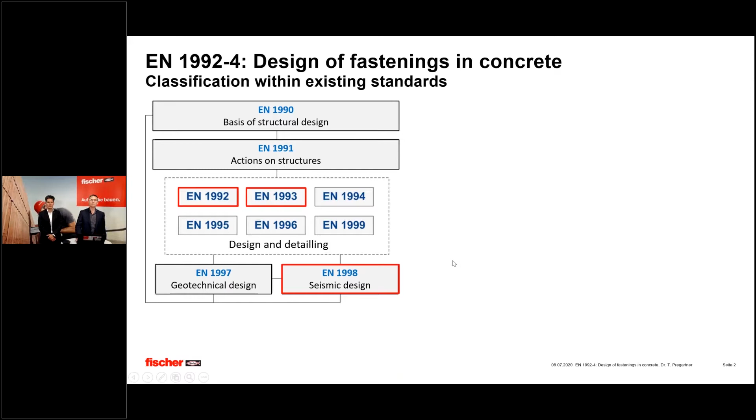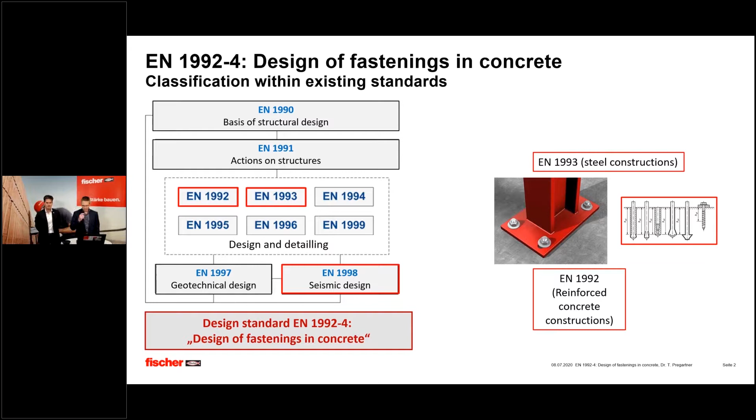We have one Eurocode for geotechnical design, and Eurocode 8 for seismic design. There are 3 Eurocodes in red boxes, which are Eurocodes 2, 3, and 8. Why is that? It is because in general, if we talk about fastening technology in concrete, we try to connect steel structures with reinforced concrete structures. And according to the base material we are anchoring in, EC2 Part 4 was published as an additional part of Eurocode 2.

It's called Design of Fastenings in Concrete. A quick overview of the status before Eurocode 2 Part 4 was published. On the left side, you see as examples 6 different papers, documents or guidelines which were used before Eurocode 2 Part 4 was published for the design of anchors. So we had, for example, Technical Report 029 for design of bonded anchors. We had the famous Annex C, which was the first ETAG part and the first European paper about the design of anchors in concrete.

We have something for fire, something for seismic design, anchor channels, and we had the technical specifications. All that changed with the publication of Eurocode 2 Part 4, which superseded all prior existing design guidelines in the framework of European technical assessments published by EOTA.

Yeah, I already have the first question. We had that when we were running this online seminar in Germany. There was the question: is Eurocode 2 Part 4 already introduced? Can we already calculate according to Eurocode 2 Part 4? And the second question: is it still allowed to use the old one when we see that probably we are a little bit better with the old one?

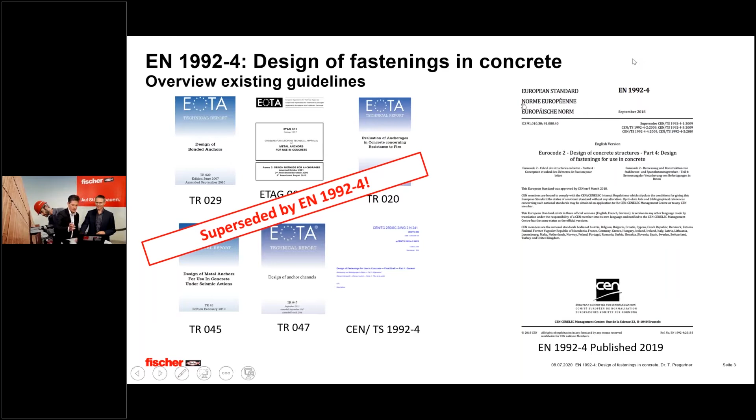Part 4 offers a lot of advantages, some of which I try to summarize on this slide. With publishing it, the most recent state of the art in terms of anchor design in concrete was published. It is now a standard instead of a guideline, which changes the legal validity of anchor design in concrete.

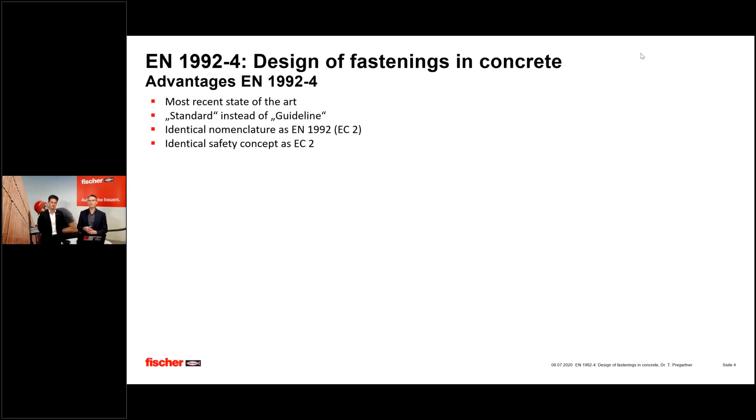Besides that, the nomenclature and the safety concept of anchor design was adapted to Eurocode 2 and in general to the Eurocode system. Besides that, you have a variety of different anchor systems that you can design with only one document, for example metal anchors, adhesive anchors, but also cast-in-place solutions like headed studs or anchor channels.

Pretty much the same is valid for different loading types. Static and quasi-static loads are covered, of course, in EC 2-4, but also seismic design for seismic loads, dynamic loads, and design for fire attack. In general, EC 2 Part 4 provides a lot more transparency of anchor design in concrete and gives you in one document everything you need as an engineer.

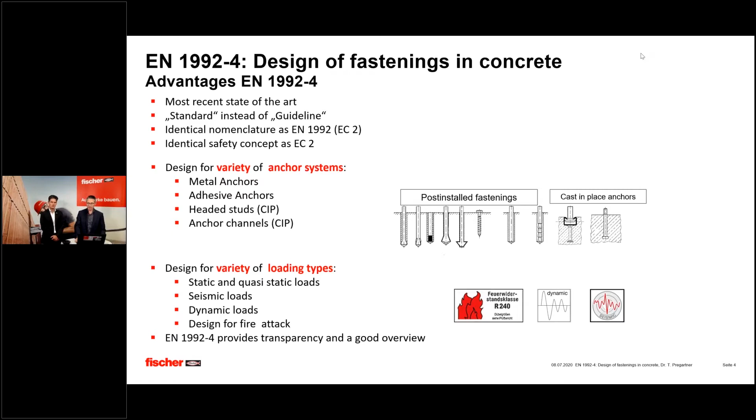Perfect. One of the most important requirements when you work with EN 1992-4 is the fact that you can design only products that have a European technical product assessment. EN 1992-4 was published in the framework of CEN, the European standardization body, and it provides general rules and equations for the design of anchors and fastenings in concrete.

However, as input parameters for the design concept, you need details of the anchors. These details are called performance parameters, and performance parameters are published in European technical assessments, ETAs. Based on ETAs, you are also allowed as a manufacturer to affix a CE mark on your product, and you can get an ETA if a European assessment document exists for it. This is also called an EAD, and it provides the methods and criteria to derive the performance parameters which you need finally in EN 1992-4 to have a valid anchor design.

One question on that slide from my side. So you have the design method implemented in a code. Can you also imagine the performance parameters one day being integrated into a code, or do you not see that for the midterm future?

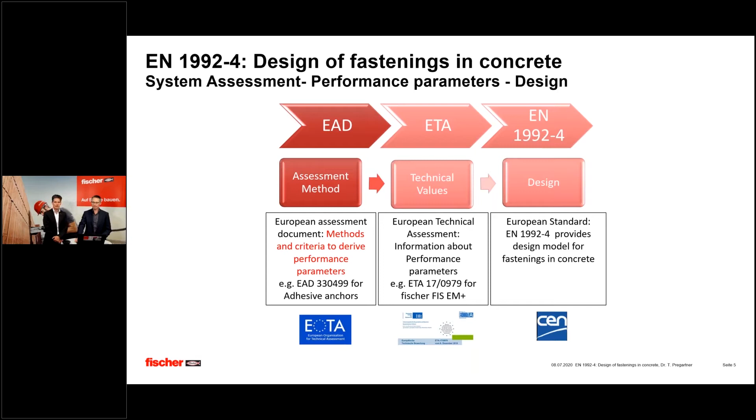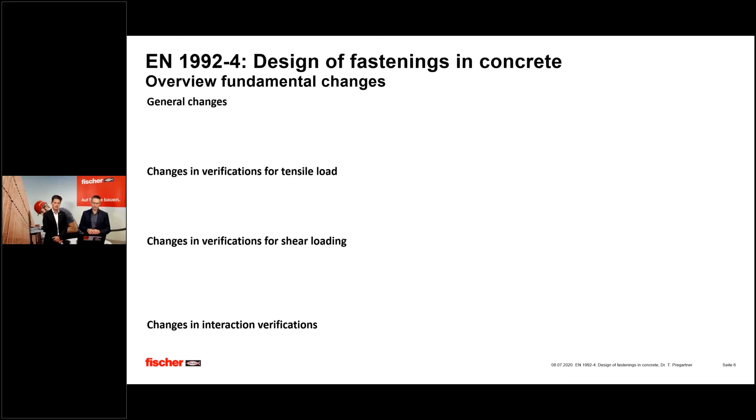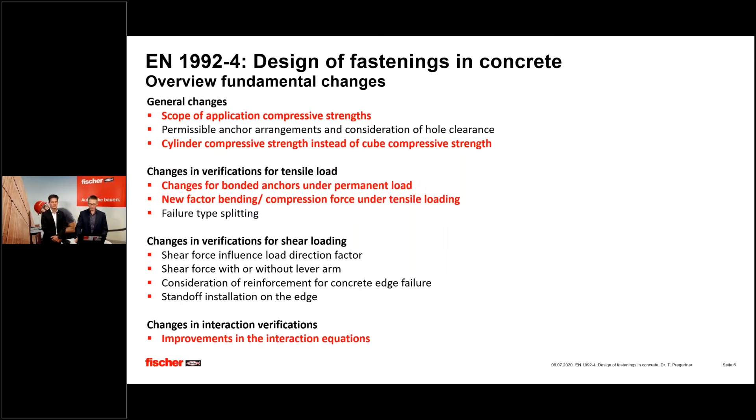Okay, very good. So let's get to the center of the presentation today, which are more or less the fundamental changes you face with the introduction of EC2 Part 4. I tried to cluster them into 4 different topics, and then filled them with detailed topics, which is the list you see here. We have only 45 minutes. Of course, I could talk the whole day about this very interesting topic, but we don't want to bother you that much with it, so we focused on the 5 points currently highlighted in red, and I'd like to go through it if there are no further questions.

Okay, then let's get started with the general changes of EN 1992-4, and first we'll talk about concrete strength classes. If you look at the old design guidelines like ETAG 001 Annex C, but also Technical Report 029, they covered a concrete strength class range between C20 and C50. If you look now into EN 1992-4, you'll see the range really got broader, and you can now design anchors in C12 to C90.

However, we learned before that we are within a system, right? We have to consider that as a basis of design according to EN 1992-4, you need ETA-assessed products. There's currently still a gap, which means if you look at the corresponding EADs for metal anchors or adhesive anchors, for example, the scope is still restricted to C20 to C50 as concrete strength class. So there's a possible amendment of the EAD in the future, and I have to say that we as a company already started working on that in the EOTA working groups to get, in the near future, ETAs that cover the whole compressive strength range that's offered.

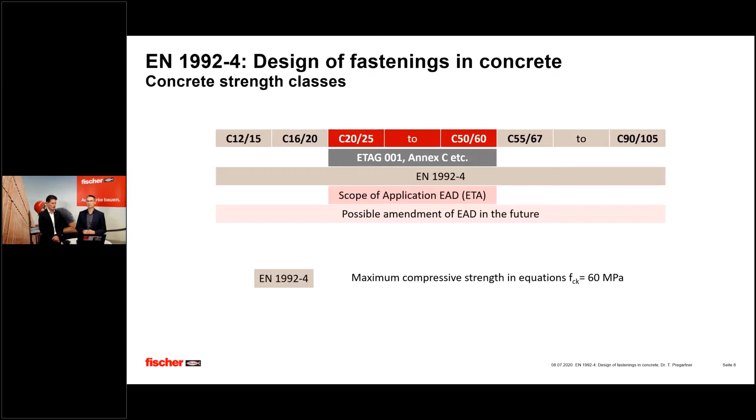Perfect. Then another topic which is pretty important, and sometimes a bit strange if you look into the code in detail, is that the reference of the compressive strength testing specimen changed. In general, you have the possibility to measure concrete strength with 300 millimeter cylinders, as shown on the left, or 150 millimeter cubes. You see that already in the denomination of our concrete compressive strength classes, so we usually have two values that define a strength class. For example, C2025 means a cylinder strength of 20 megapascal and a cube strength of 25 megapascal. In these values, as they characterize the same and identical concrete, you see there's already a conversion factor in between, which has the value of 1.25 in low strength concrete and 1.2 in high strength concrete.

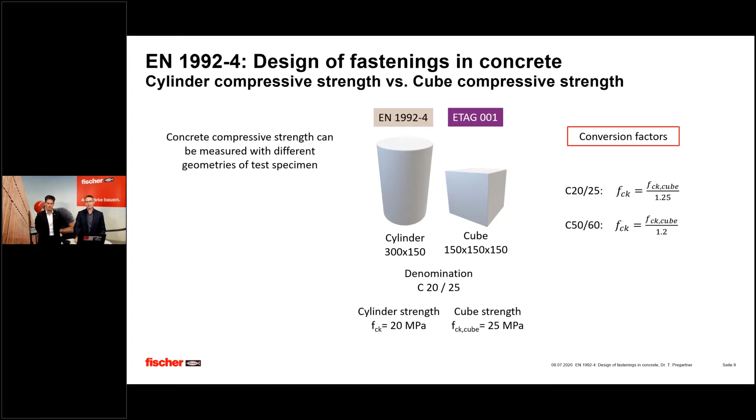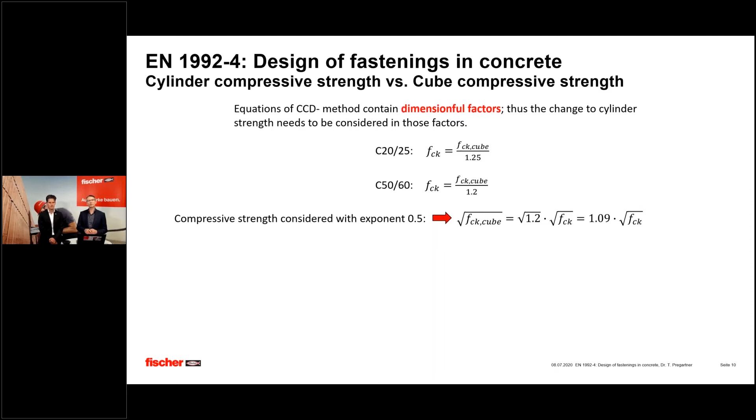Now, this difference in conversion between cylinder strength and cube strength, you have to consider in the CCD method. The CCD method has a lot of equations that contain dimensionful factors, which makes it sometimes a bit difficult, because you always have to use the same dimensions within the equation. So the first factor of it is not really clean of dimensions. Therefore, you have to consider this transfer from cube strength to cylinder strength by an additional factor. And if you insert the conversion factor of 1.2 under the square root, because the concrete compressive strength is usually considered under the square root in the equations, then you get an increasing factor of 9%.

If you look now into the details, for example into the characteristic resistance for a single anchor for concrete cone failure, then you see that between the old guidelines and the new EN 1992-4, the equation and the influencing parameters stayed the same.

It changed the reference from cube strength to cylinder strength, and the factors also changed slightly, which means they got increased from 7.2 to 7.7 in cracked concrete and 10.1 to 11 in uncracked concrete. In general, you have to consider that even if you use the cylinder strength already with the dimensional factor, still...

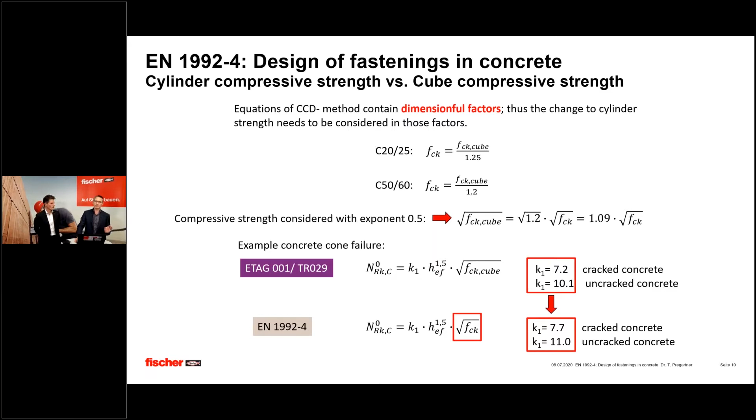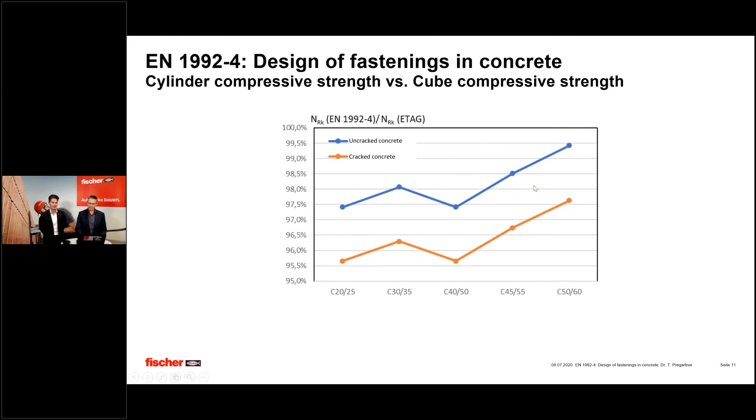you have to insert the compressive strength under the square root, and that causes the fact that considering both the dimensional factor, which got increased, but also the compressive strength under the square root, the characteristic resistance decreased if you compare the values according to EN 1992-4 with the values of the old guidelines, which I tried to show here in this graph, where you see that a maximum decrease of this reference value of the characteristic resistance of 4.5% can be encountered. Besides, it depends on the concrete strength class, as the conversion factor changes, obviously, and they rounded it slightly different in uncracked and cracked concrete.

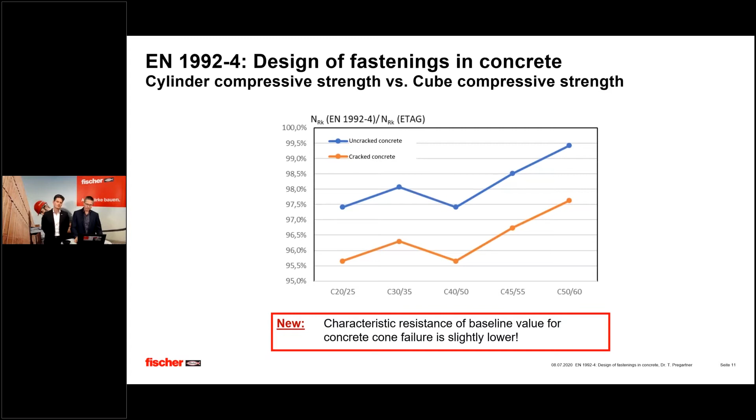So in general, if you compare the results directly, you will find that the characteristic resistance, the baseline value, decreased. If you look now at different failure modes, I show on this slide concrete edge failure, which also contains a dimensionful factor, and compare the equations.

Again, the cube strength changed to cylinder strength. The denomination of the first factor went from K1 to K9. However, the value stayed the same, so it is still 1.7 and 2.4 for cracked and uncracked concrete.

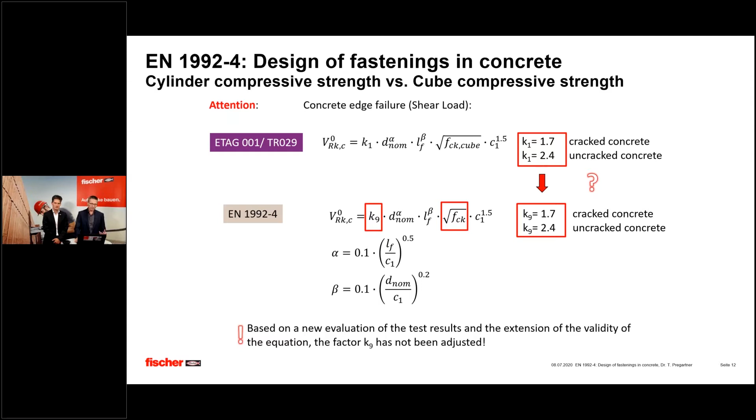Now, why is that? That is because during the development and the work on the new standard, EN 1992-4, they decided to reevaluate and reassess this complete failure mode. First of all, to make this conversion to the new compressive strength, but also to broaden the scope of the equation to larger embedment depth and in some parts also larger diameters. And with that, they still found that these two factors, 1.7 and 2.4, match best the results of the tests and the finite element simulations that were the basis of the scientific work for this equation.

Good, now let's have a look at one of the most important changes. If you look at EC2 Part 4 in total, compared with the guidelines before, this concerns verifications for tensile loads, especially for adhesive anchors. The reason for these pretty big changes in anchor design was an accident that happened in 2006 in the US.

It happened in a road tunnel in Boston, where ceiling panels fell down onto a driving car and a passenger got killed. The root cause of this failure was the utilization of an epoxy resin which failed under permanent tensile loading. This accident caused a lot of additional research in the world of anchors.

Adhesive anchors have one speciality: they have a special failure mode called combined pull-out and concrete cone failure. Adhesive anchors have a variable embedment depth between 4 times and 20 times the diameter, giving you a very flexible range to choose your anchorage length.

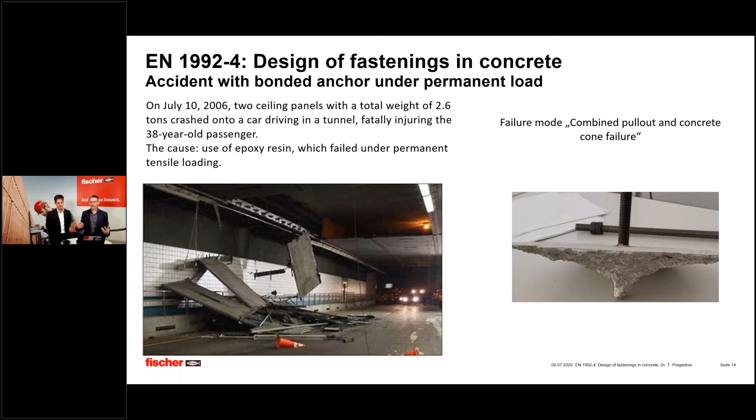Coming with that, they also tend to change their failure mode, either with increasing embedment or with reducing bond strength. In the photo on the right, you see an adhesive anchor with high bond strength and low embedment, showing a beautiful concrete cone failure, where the anchor was able to activate the full concrete cone until the end of the anchor rod.

Now, if you installed this anchor a bit deeper, or reduced the bond strength due to temperature for example, you would get a failure mode that looks like this, where you get pull-out failure at the bottom of the anchor, while close to the surface there is still a concrete cone failure.

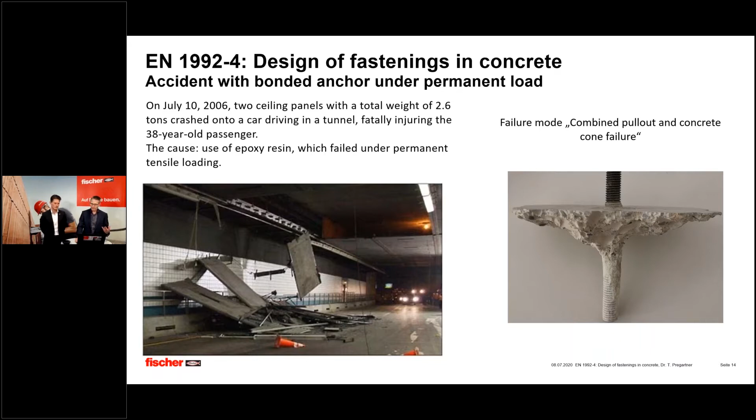And this is covered in design by this combined pull-out and concrete cone failure mode. And there, the changes concerning this sustained loading behavior were introduced.

Generally, you have two possibilities to test or to qualify an anchor for sustained loading, or to show that it's suited for sustained loading, which you have to do for any adhesive anchor qualified according to our EADs.

One possibility is that you work with a relatively low sustained load, a low creep load, and you measure the displacements of your anchor over time. Finally, you do an extrapolation of your displacement, and then you define a limit of maximum displacement which you allow as safe. You say, okay, if I stay below this limit, then my anchor is suitable for sustained loading.

The other possibility is our so-called time to failure tests. In time to failure tests, you work with relatively high constant creep loads on the system, roughly between 95% and 65% of the short-term reference value. With doing that, you get relatively short failure times. Short means up to 6 months, a time frame that an anchor manufacturer is willing to wait for his ETA approval.

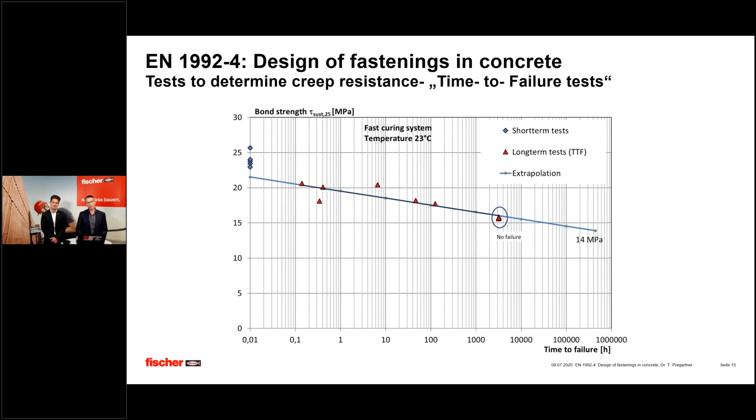Now, if you extrapolate these values of the time to failure test to the service life of 50 years, then you end up roughly at a drop of the transferable bond strength, at the end of the service life of your fastening, of roughly 40%, to a value of 0.6. And this value of 0.6 found its way into the design equations for this combined pull-out failure mode.

On the top left, you see the equations for the single anchor without edge influence and without spacing influence. It is calculated with a characteristic bond strength and a surface area. And then in EN 1992-4 this value is psi sus.

Psi sustained is a function of the value alpha sustained, where alpha sustained is the ratio between the creep-inducing permanent load and the value of the total load. So more or less, alpha sus shows you how big the part is of a constant load, which is always on your system, compared to the sum of permanent load and variable load.

If you draw now the equation of psi sus in a diagram, then you get this picture. Psi sus is on the y-axis, alpha sus is on the x-axis, and you see that psi sus stays 1.0 until the value alpha sus reaches psi null sustained. And then you start decreasing your characteristic resistance until the full reduction factor of 0.6, which is the red line here, once you reach 100% creep load compared to the sum of the total loads.

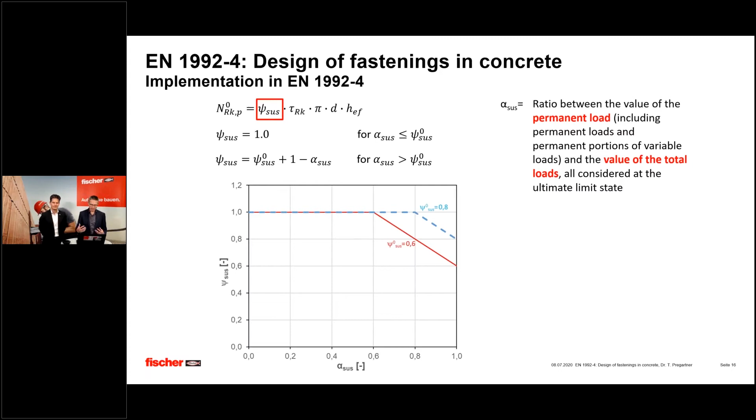Now, where do you get this factor of psi null sus from? The EN 1992-4 says you have to look into your European technical product specification. And if you don't find a value there, then please use the value 0.6.

If you look now as an example at the ETA assessment of the FIS-SB super bond, then you find there already this reduction factor psi null sus inside, and it has values between 0.84 and 0.91.

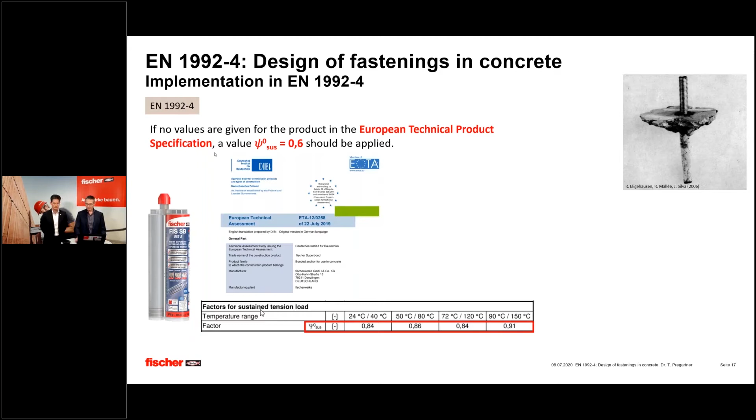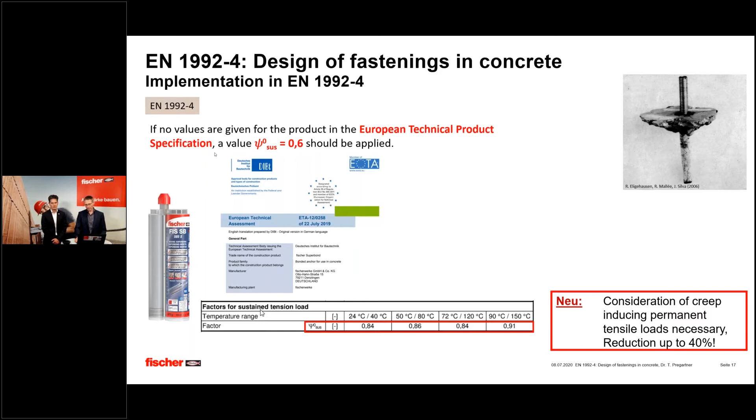So in general, for you to remember, this factor psi sus can influence the design and the utilization degree of your applications very much. So it is the new state of the art, and based on that, you should give it a thought to consider it in the future if you have applications where you have a high percentage of creep-inducing load.

Now we had enough reduction factor. Let's get to something which is also increasing our performance, and this factor is called psi M,N. It is a factor that you apply for the design for concrete cone failure in groups if you have bending and compression under your fixture.

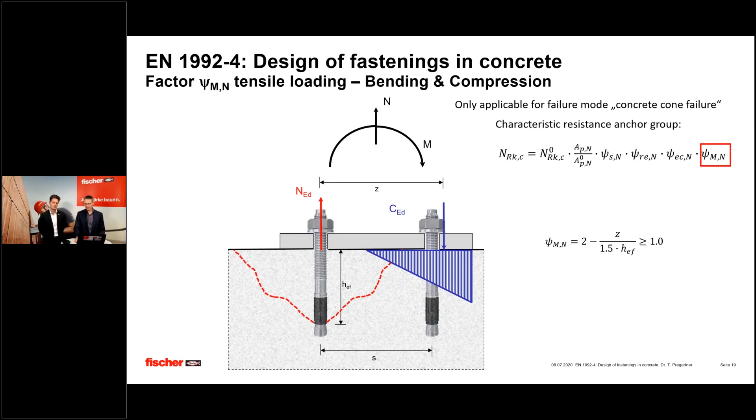At a theoretical value of the inner lever arm of 0, you get the maximum increasing factor of 2.0, and at an inner lever arm of 1.5, it reduces to the value of 1.0. It is not a reduction factor, it just reduces to 1.0.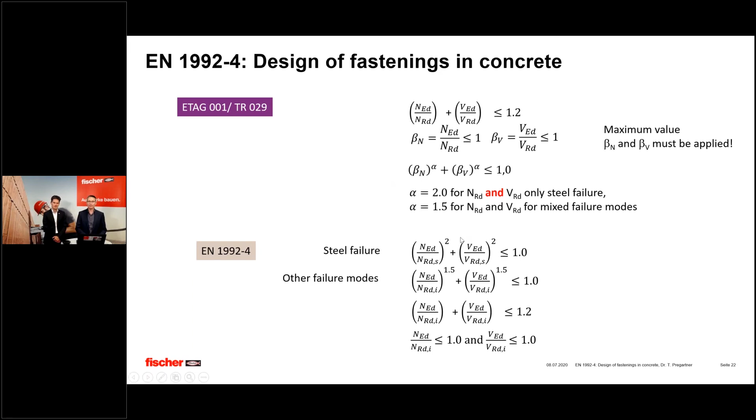EN 1992-4 improved this. Now you always have to do two different design proofs for interaction: one for steel failure with the quadratic interaction equation, and an additional one for the other failure modes.

Now what does that mean? Let me show that in one graph, with design resistance in tension on the y-axis and design resistance in shear on the x-axis. You see already that in tension, concrete failure gives the lower value compared to steel failure, whereas in shear, steel failure is decisive.

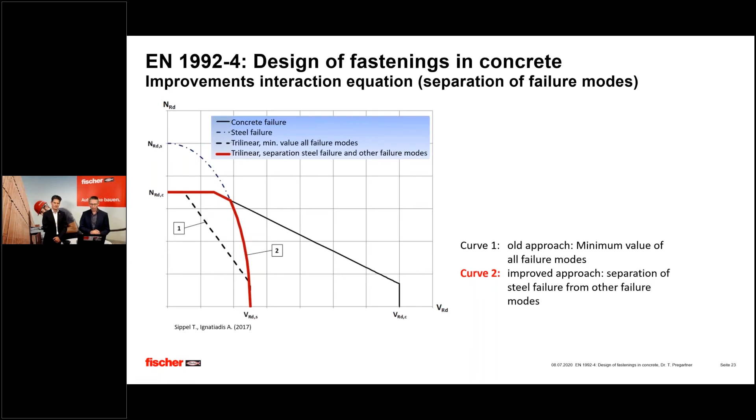The old interaction equation required line 1, done with a linear interaction, which is relatively conservative. If you work according to Eurocode 2 Part 4, you first do the interaction equation for steel failure, giving this dotted-dashed line, then the additional interaction proof with a bold line for the concrete-related failure mode. The final design proof is the combination of the two, giving this red line, called curve 2, which is the function of the utilization degree. You see the area between lines 2 and 1 is what you gain in additional performance if you work according to EN 1992-4.

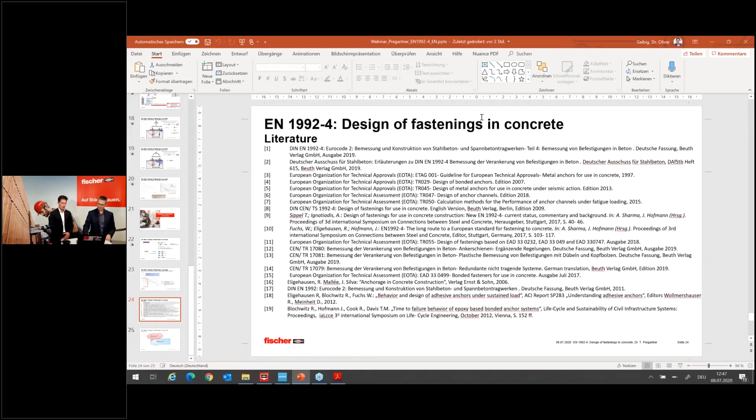So the literature—if you want to dig deeper into the topic, we can provide you that list. That was something we brought together, but it's probably not fully complete, but we can provide that for you.

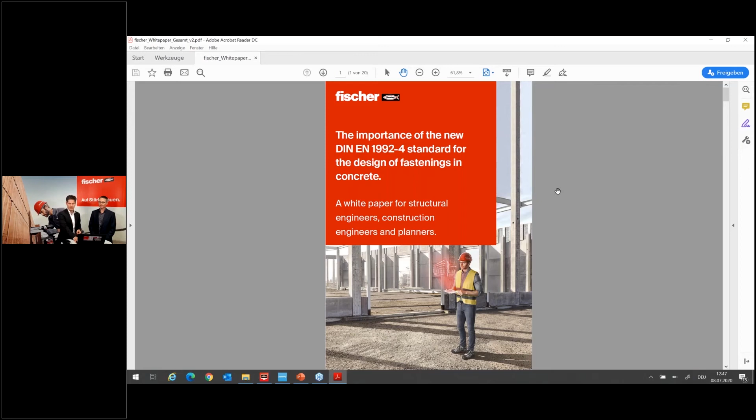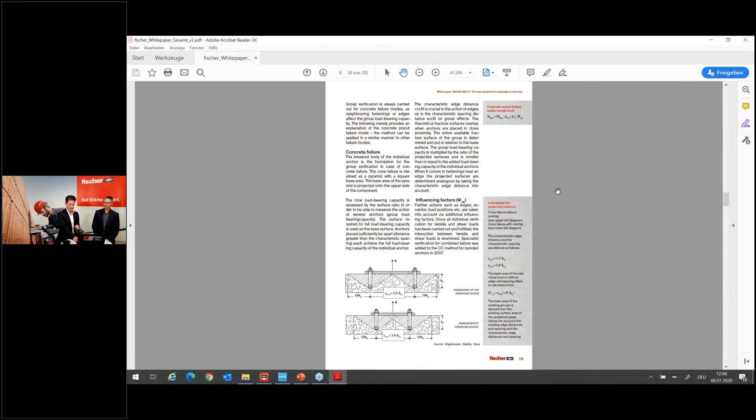Also, if you want to further deep dive, we prepared a white paper, which you already opened now. This is on the importance of the new DIN EN, or EN 1992 Part 4 standard, for design of fastenings in concrete. We won't go through that—it's 20 pages—but you can further deep dive on all those topics, and we can provide that to you at the end. When we end the online seminar, there's a short survey.

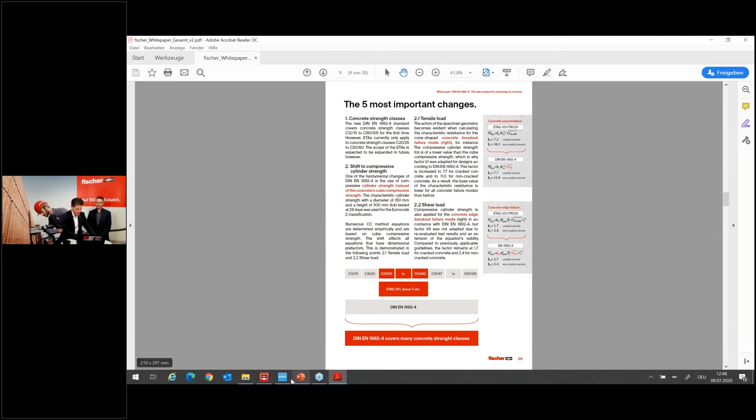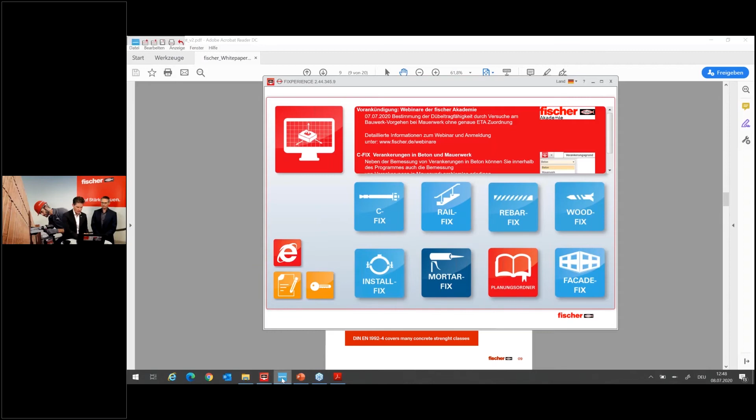Now what we also promised you, we'll jump into our software. This is the Fixperience suite with several modules. One is C-FIX for anchor design, as you can also see in the picture here. When you open it, you can change the country - it's still in Germany, but you can also change to your own country - and the language is now in English.

What we are going to do now, we have 3 examples that Thilo will show you. First of all, there is the psi-sus factor, and there we have prepared a chemical anchor, the FIS-V, an all-round mortar for concrete, also for masonry.

Perhaps you can describe this example a little bit. That's an adhesive anchor, FIS-V, in a group of 4. Embedment is relatively deep, 300 millimeters. Design method is EN 1992-4, which you see in the top left. There's a tension load of 250 kilonewton applied. If you look at the utilization degree, currently, designing according to EN 1992-4, the situation is overloaded by roughly 20%.

If you change now to design according to ETAG, you'll see that the utilization degree reduces to below 100%. That is due to the fact that the load is reduced by this reduction factor psi-sus, which I explained before, which we as a manufacturer recommend you consider in design going forward - if you have applications with a significant amount of creep-inducing load. Right, we recommend using the new design method. So that was one example where you already see why you should use the latest state-of-the-art design method.

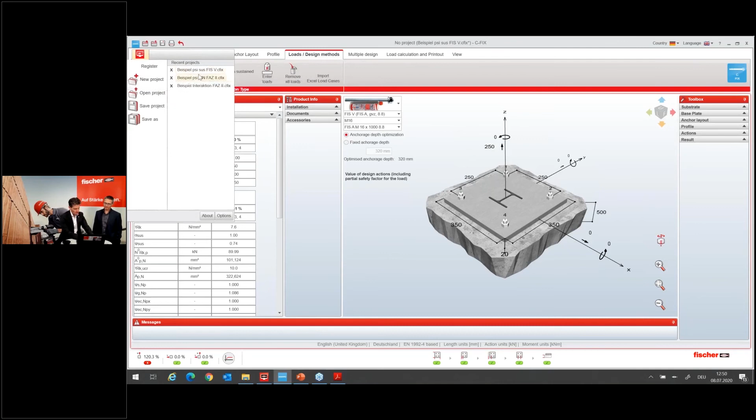Then the second example, also following our slides, was the psi M,N factor, which can have a positive influence on your anchor design. Probably you can describe this example too. That's an example for a bolt anchor, psi M,N. You see already that you need relatively small spacings for it to be activated.

Design is now according to EN 1992-4. If you look at the utilization degree, it's below 100%. If you look at the results, it's getting pretty small - the factor psi M,N is 1.19 in this case, due to the fact that you have a compression force under the fixture and your inner lever arm is relatively small.

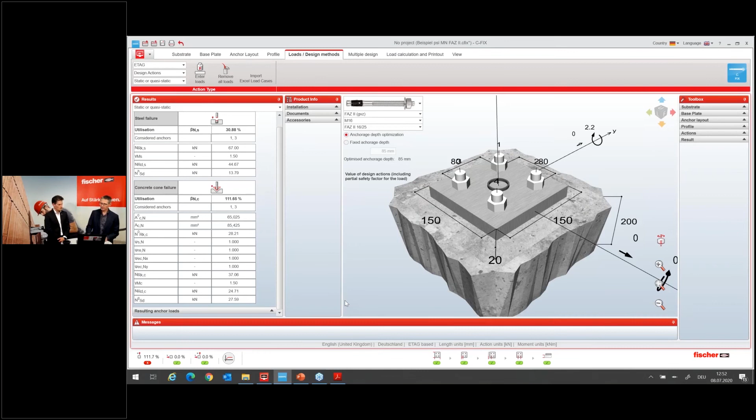If you change now to ETAG design, you'll see that the utilization degree increases to 112%. So it's overloaded, and designing with ETAG, you would need to change either your anchor configuration or anchor type to get the load transferred.

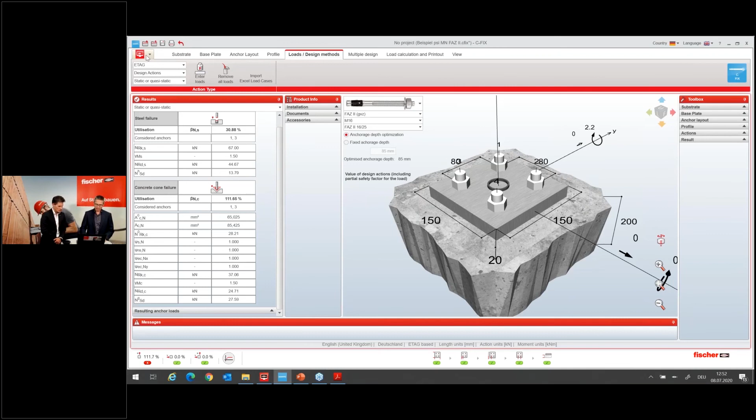So the last example will be the interaction between tension and shear. Okay, that's not a problem. Perfect. So last example for today, and then I think everybody's going to head for lunch. It's the interaction equation, and there we again have a group of 4 anchors with a through bolt.

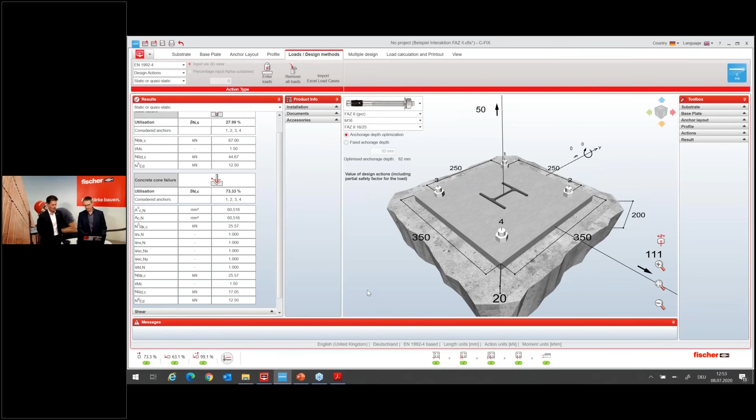We have a tension load of 50 kilonewton and a shear load of 111 kilonewton. Design is currently ETAG design. If you look at the utilization degree, the situation is overloaded by roughly 6%. If you change now back to EN 1992-4, you'll see that the utilization degree decreases to below 100%, and you can realize this application in practice.

This is due to the fact that the interaction equation is now always performed with 2 design proofs - one for steel failure and one for the other failure mode - which you can also see in the details of the results.

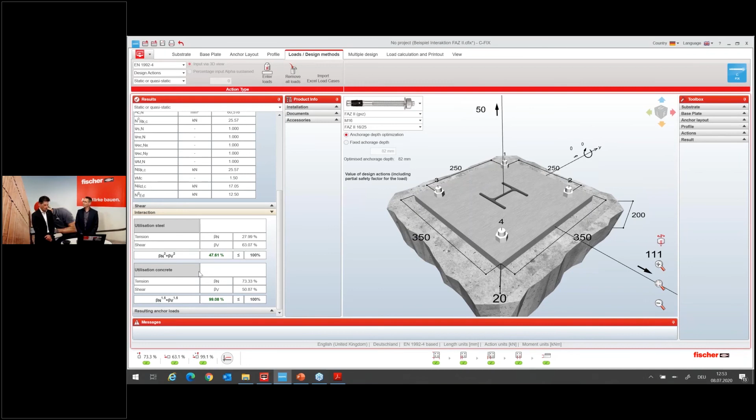Thank you, Thilo, for the explanations. You could say now we have Eurocode 2 Part 4, so why do you still have the old ETAG in your design software? That has 2 reasons. There might be some projects where you've already designed according to the old method, where you're still allowed to use it. That's one point. The second point is to give engineers a good gut feeling when they compare - this was the old, this is the new. To make that easier, we still continue for a while to have both design codes in our software. The clear recommendation is that you only design with the new one.

If you don't have the software - which I hope isn't the case - but if you want that software, that's not a problem at all. You can register quickly, then download and install it. Very soon there will also be an online version; we are working on that, already released in Germany, and more countries will follow. You only register once on the Fischer platform, and there you'll already find the icon to start the design software.

Probably there are some more further questions. Yes, there are, and I would ask you two more questions because of time.